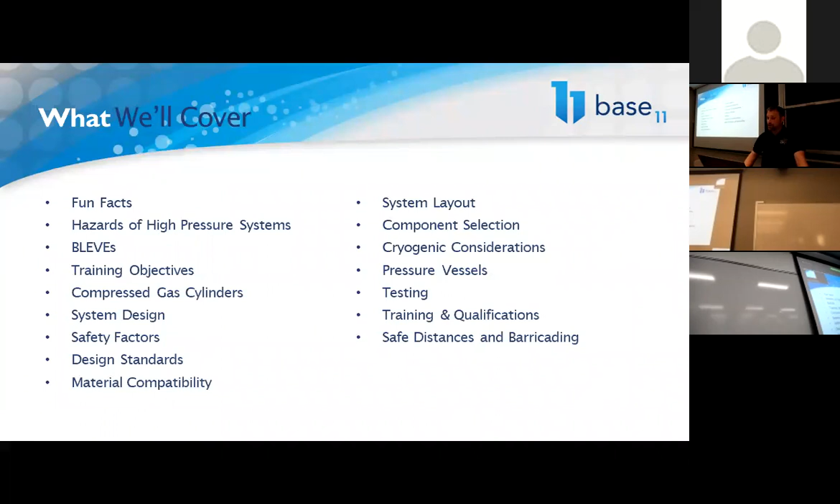Okay, so we're going to be covering a lot of ground here. Some of this is going to touch on other sections. It's a pretty comprehensive subject, and so we'll probably go a little bit faster through some of those things.

But I want to start with a few fun facts, because at the end of the day, what we're dealing with in any high pressure system is stored energy. And there is usually a lot more of it in a pressure system than you might appreciate. A standard decent sized industrial gas cylinder will hold the equivalent of about a pound of TNT. So that's some serious explosive potential there. Just ordinary compressed air from a regular shop compressor can easily dislodge an eyeball from its socket.

It can rupture an eardrum, or it can create hemorrhaging. A 100 psi gas jet through a 1/8 inch diameter orifice, if that happens right at the surface of your skin, can actually enter and inflate your flesh and even cause bubbles in the bloodstream, which can be incredibly painful, if not fatal.

Even air under 40 psi from a hose can kick up debris. It can project metal chips around that can easily puncture your skin or your eyes. And if a hose does fail, it can whip around, and the hazard of that whipping hose can be pretty serious as well.

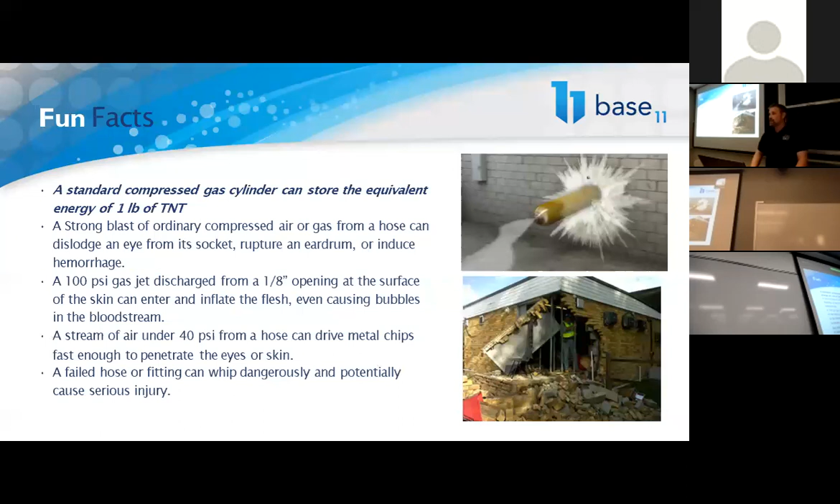So yeah, the goal of this piece of the talk is to try to scare you guys a little bit and leave you with the impression that there are some real hazards here, and that there's a lot of energy that you need to be aware of. Now, the good news is that all of these are entirely possible to deal with, but you need to be aware of what they are, and so that's what we're trying to get across here.

So in any high pressure system, you basically have two main categories of hazards that you're potentially going to face. One are the hazards presented by the fluids themselves. You could have flammable agents, oxidizers, toxic chemicals potentially. You can have asphyxiants. If these things leak out, then you're going to have to deal with the results. Sometimes these fluids will also cause negative effects on the components in systems. They can corrode them, they can embrittle them, and so all of these hazards, due to the substances themselves, are going to be really important to bear in mind.

But the other big piece of it is stored energy, and this is just intrinsic in any high pressure system, which is why we use high pressure systems, because they're good ways of storing and delivering energy. But there is a lot of energy there, particularly when a gas is compressed. Now, gas at a given pressure stores a great deal more energy than water or a non-compressible fluid does. So that's why, in hydraulic systems, pressures upwards of 6,000 psi are pretty common, whereas in a pneumatic system, that's frighteningly high pressure. And so you need to be particularly careful when you're dealing with compressed gases, just because of that compressibility.

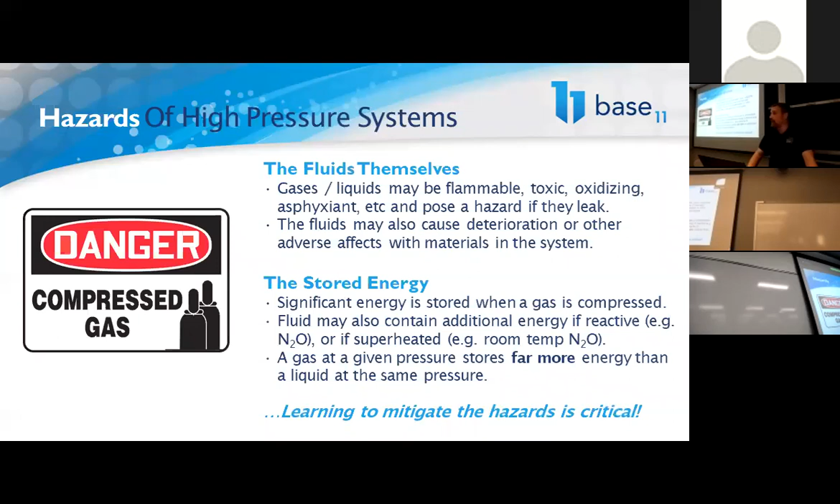There can also be other sources of energy apart from just that pressure energy. If you've got a fluid that's reactive, nitrous oxide is a monopropellant, it can exothermically decompose on its own. Hydrogen peroxide can as well. On top of that, any fluid that is superheated, so if you've got cryogen that's under pressure and heated above its normal boiling point, or anything else, you've got the potential of a BLEVE, which was talked about a little bit earlier on, boiling liquid expanding vapor explosion. And the force of that fluid flashing into vapor as it's released can impart additional energy to an explosion. So all of these things are going to be really important to consider in any high pressure system that you're designing, and learning how to do this safely is really important.

So one of the nice things about giving a talk on high pressure system safety is it gave me a great excuse to look through YouTube videos of things exploding and doing things that we hope will not happen to any of you guys. So we're going to see how well playing the videos over this works, but with compliments of YouTube, we've got a few useful cautionary tales.

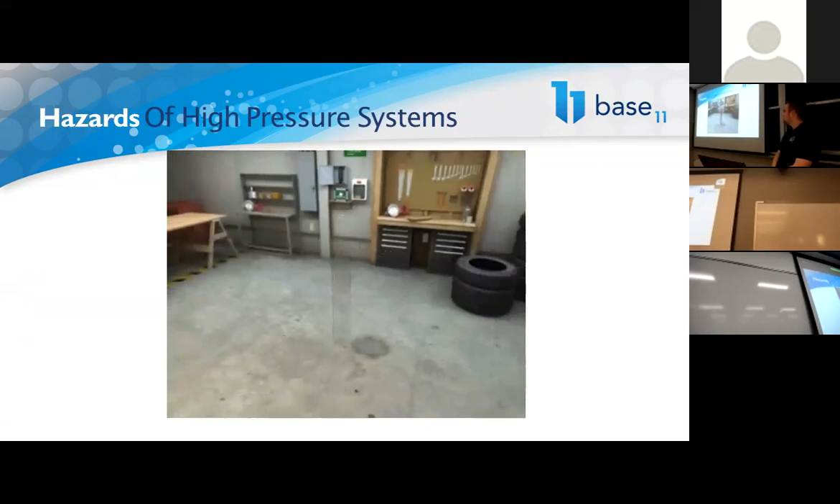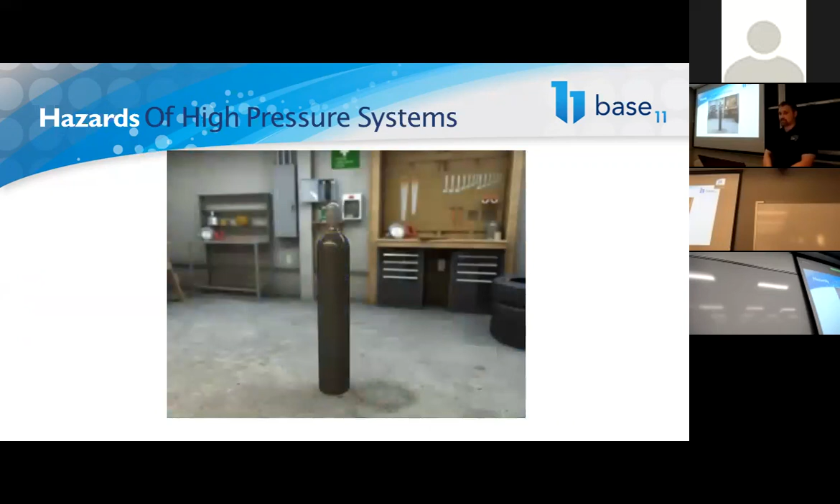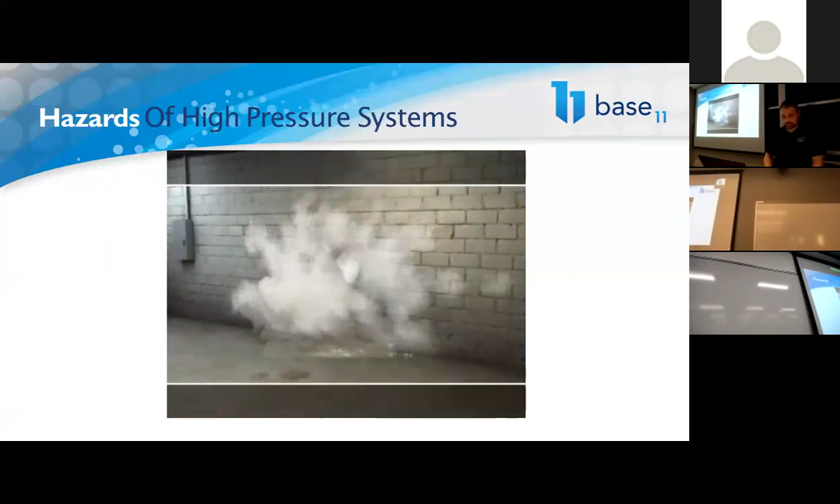When a typical cylinder is filled to its design pressure of 2400 psi, it will contain almost 300 cubic feet of atmospheric pressure gas, or about 160 times the internal volume of the cylinder. This compression of gas represents a tremendous amount of stored energy. If the outlet valve is broken off, the sudden release of compressed gas can turn the cylinder into a missile.

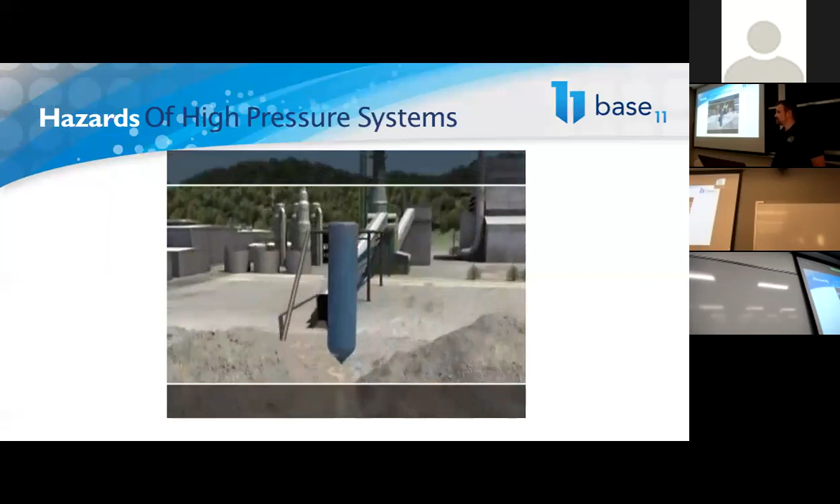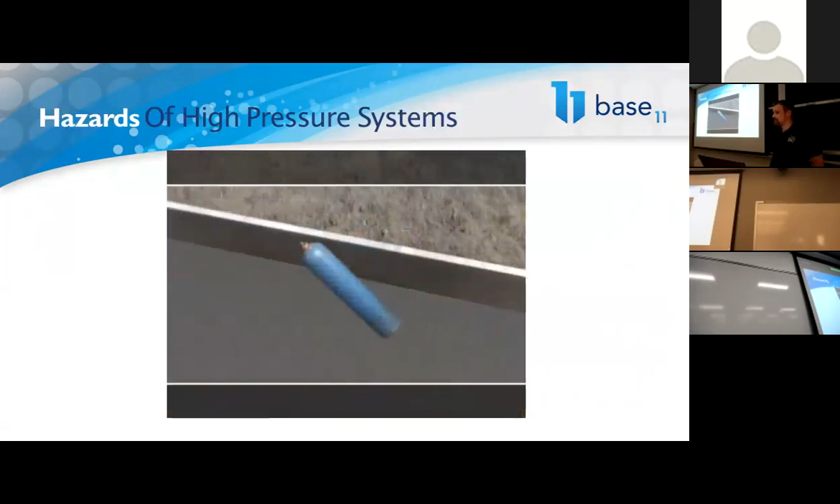With energy to shoot through a cinder block wall. In one reported incident, a damaged cylinder penetrated 2 sheet metal walls before becoming airborne and exiting through the roof. The tank reached an altitude of 140 feet before falling back through the building's roof a second time. When a steel cylinder becomes a projectile, it can move with great force, at high speeds, and in unpredictable directions, with the potential to cause serious or fatal injuries.

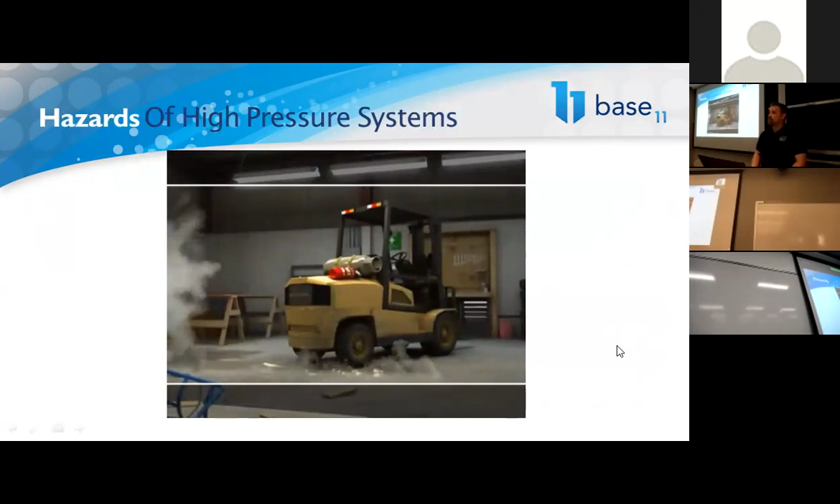So that's what can happen just with a totally ordinary high pressure gas cylinder. The Mythbusters also did a really good look at just what can happen if you shear the valve off of a high pressure gas cylinder.

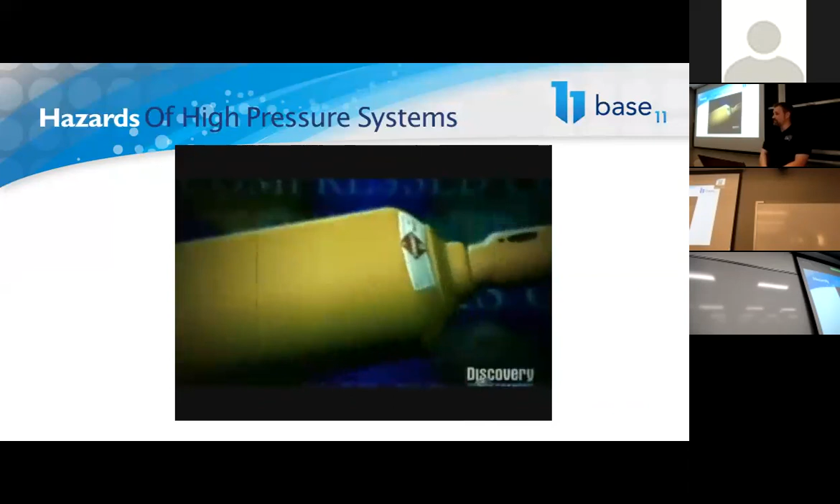High-pressure gas cylinders have been around for 100 years, and legends of their destructive potential have been around for 99. But could a ruptured tank really burrow through a brick wall?

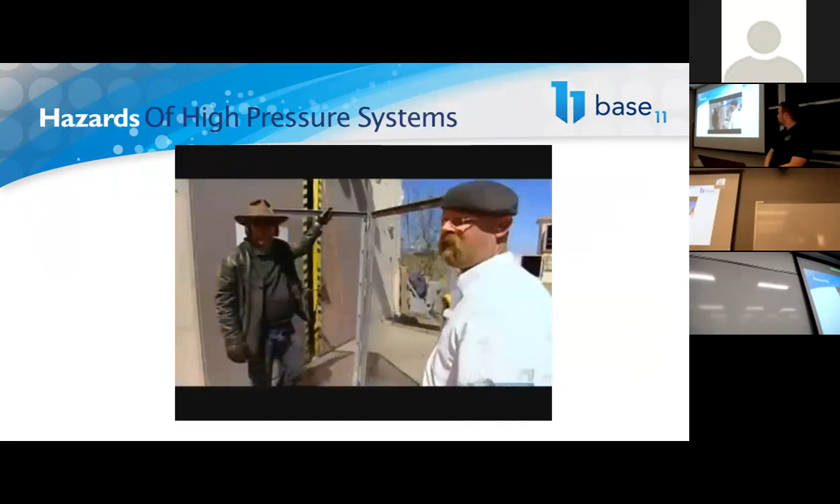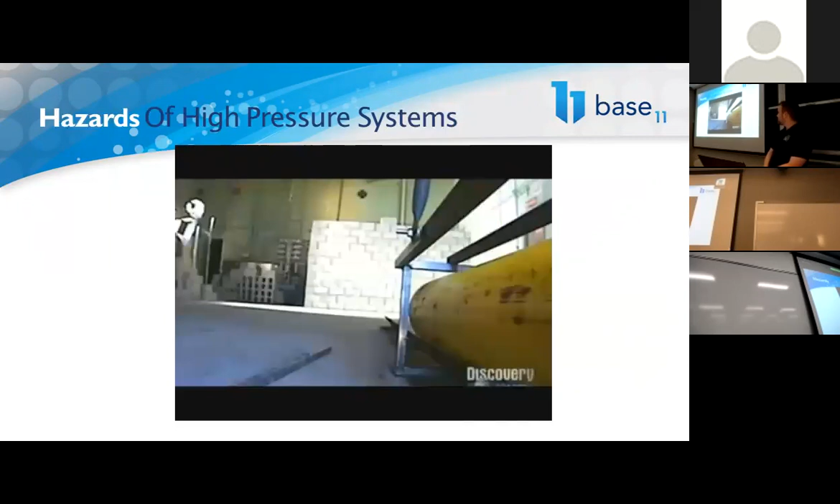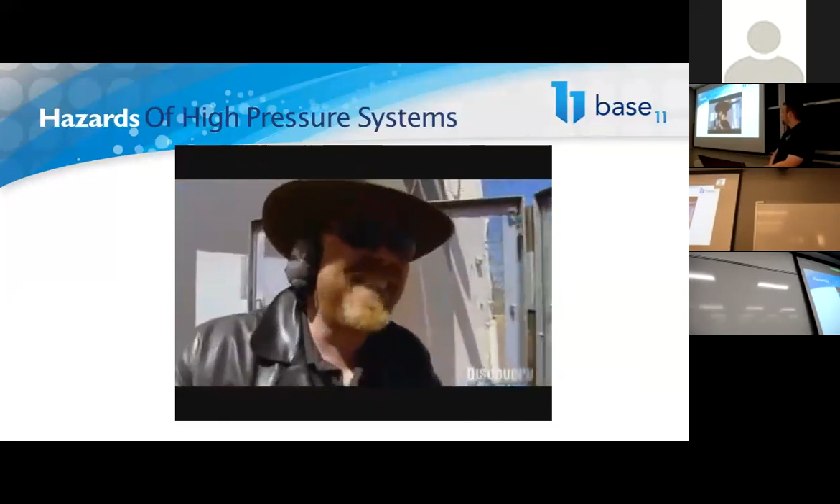Into the next county. Here we go, shearing the regulator off the tank. Attempt number 2. In 5, 4, cross your fingers, 3, 2, 1. Yeah! That's the sound! That is a lovely, lovely sound.

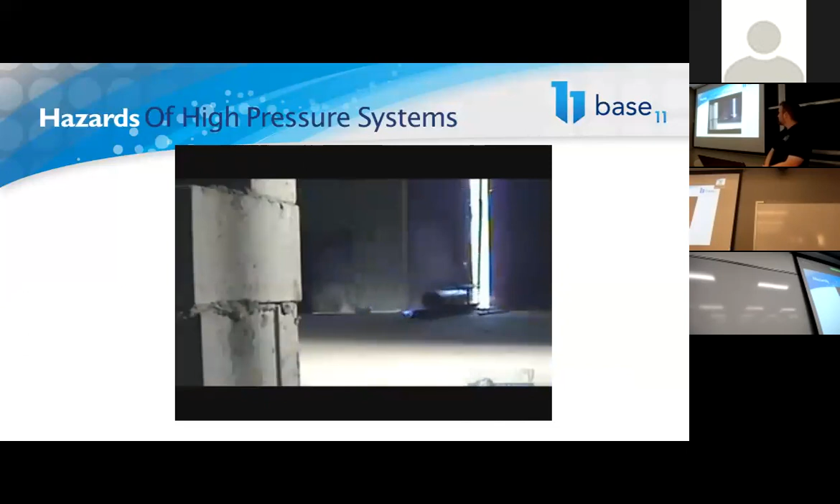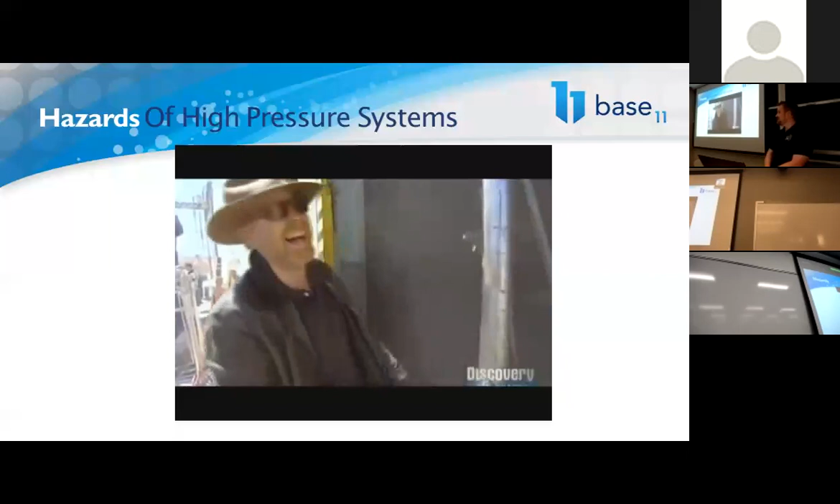The valve has sheared clean off, and that's a very good sign. It looks like the cylinder flew straight and true, but did it have enough thrust to crack the wall? Oh, God. It was the Lord that did it.

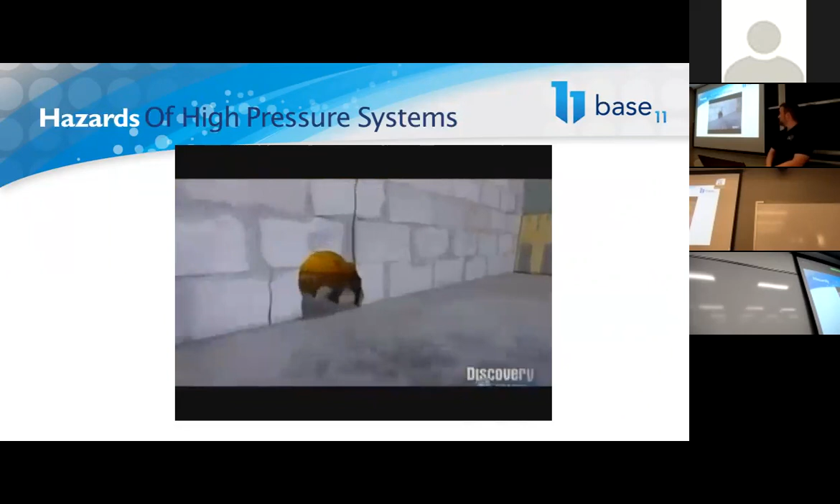At 40 miles per hour, the air tank turned the cinder block to cinders. It even put a fair dent in the wall 6 feet behind it. Totally. I mean, it didn't go all the way through, but it went through this one, and it was working its way through that one.

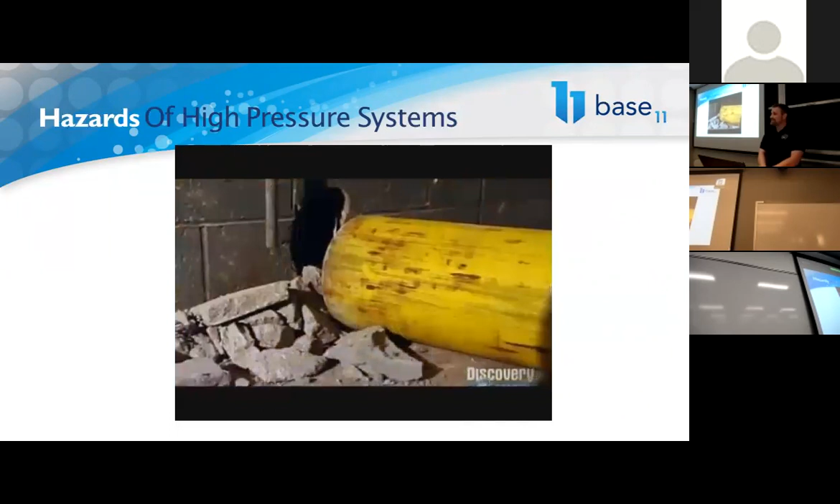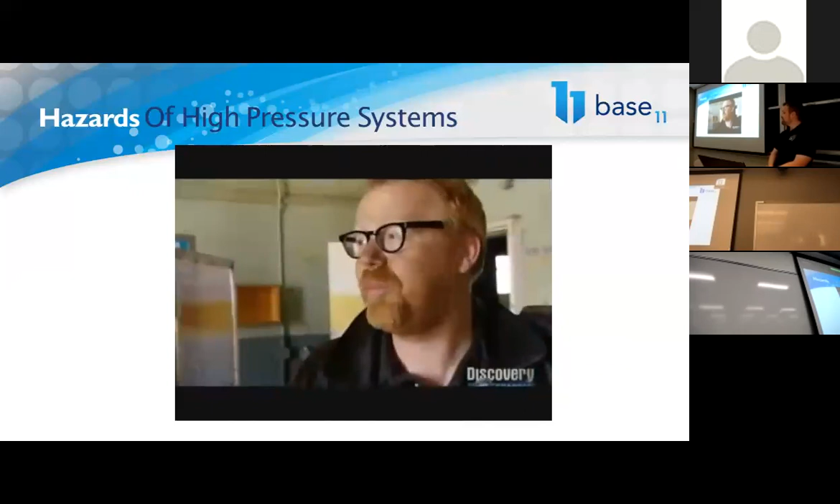I was ready to see this as not possible. I was totally expecting it not to actually work. This is one of those impossible tales. We talked about, heard the story, but no one knew anybody that it happened to. This was an optimum situation for this tank. What this tank did is as good as it gets.

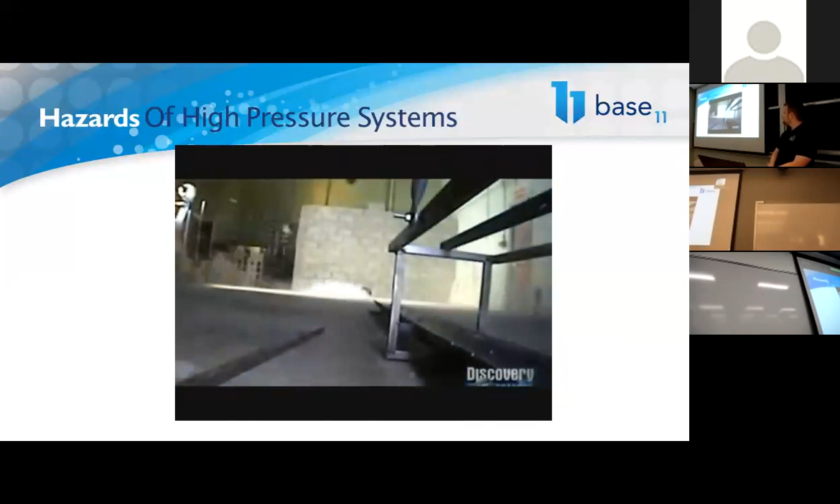My favorite thing is the perfect roundness of this hole. It also pushed this entire wall back a half an inch. Although the cylinder was deliberately aimed, you couldn't ask for a more convincing result. So let's call this myth totally and spectacularly confirmed.

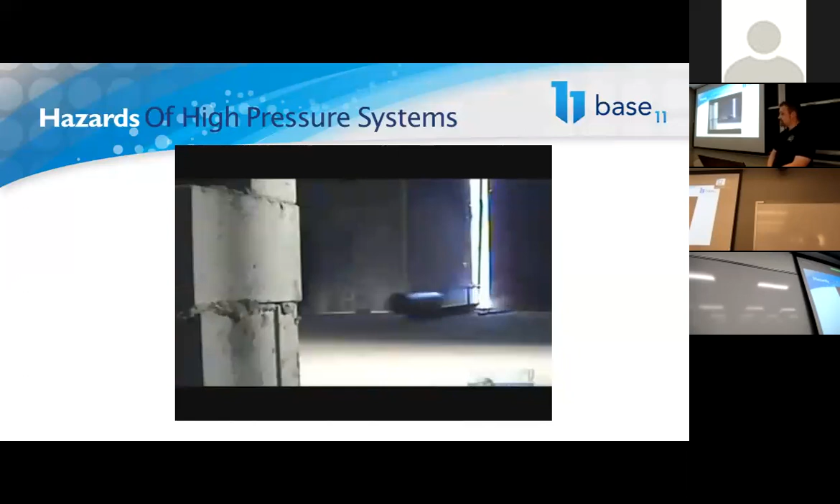And for one more look at what gas cylinders can do.

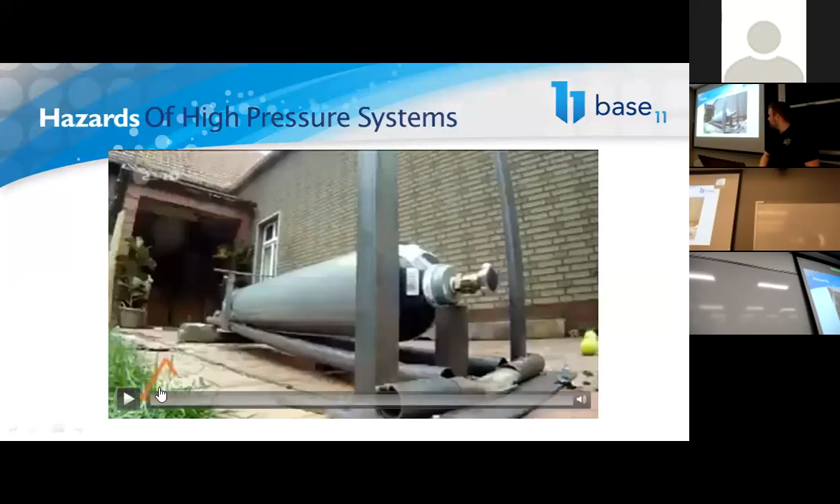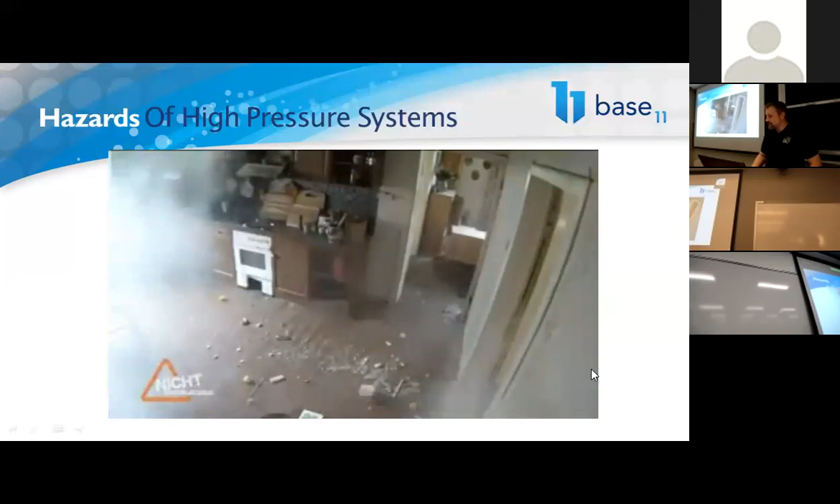Okay, so that's a little taste of just what can happen with compressed gas in a regular cylinder.

I see it's about 1:45 right now. Did we want to do the break for food, or should we go on with BLEVEs? Anyone? Long Beach? Go ahead and do the BLEVE. All right, BLEVE's coming up.

So on top of just the energy in compressed gases, if you've got a fluid that has been superheated, you've got this whole added source of energy as it suddenly expands to ambient pressure. And the force of that happening can cause blast waves. It can help propel shrapnel. And this has actually occurred a number of times. Mark mentioned one that he personally experienced.

But in industrial context, this thing has happened as well. As one example, someone at an industrial facility was using some regular carbon dioxide fire extinguishers. One of these CO2 cylinders had about 5 kilograms of liquid carbon dioxide in it. Somebody threw it into a dumpster. The dumpster was taken off to a scrapyard that put the contents through a shredder. As soon as the shredder encountered the CO2 cylinder, it ruptured it, and the result was a carbon dioxide BLEVE, so the cylinder burst into a few fragments.

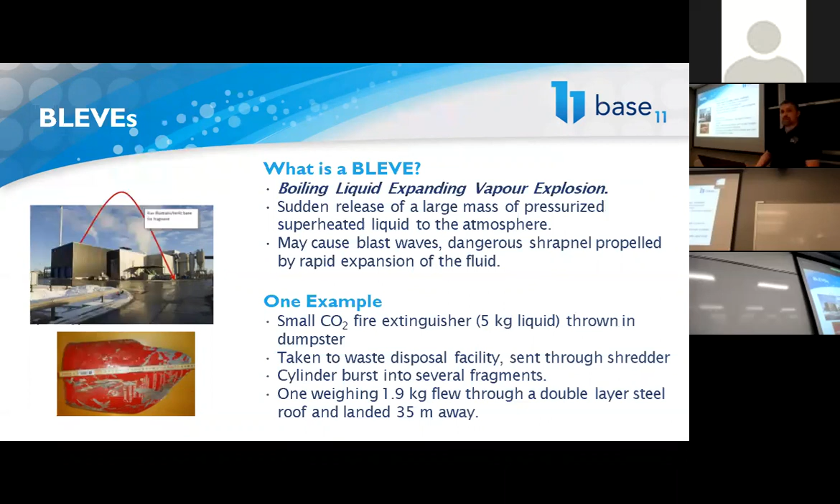You can see one of them at the bottom there. A 1.9 kilo fragment of it flew all the way through a double-layered steel roof and landed 35 meters away. And this is just a regular CO2 fire extinguisher.

One area in industry where you do sometimes see particularly dramatic BLEVEs is in things like propane and natural gas. These are generally stored under pressure, and they will definitely BLEVE if there's a fire or anything else that compromises the cylinder they're stored in.

And here is a National Fire Protection Association video looking at BLEVEs and what they can do.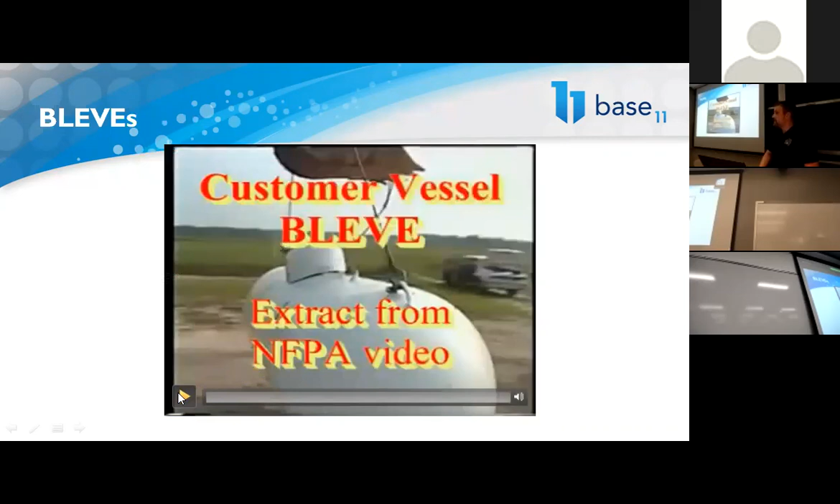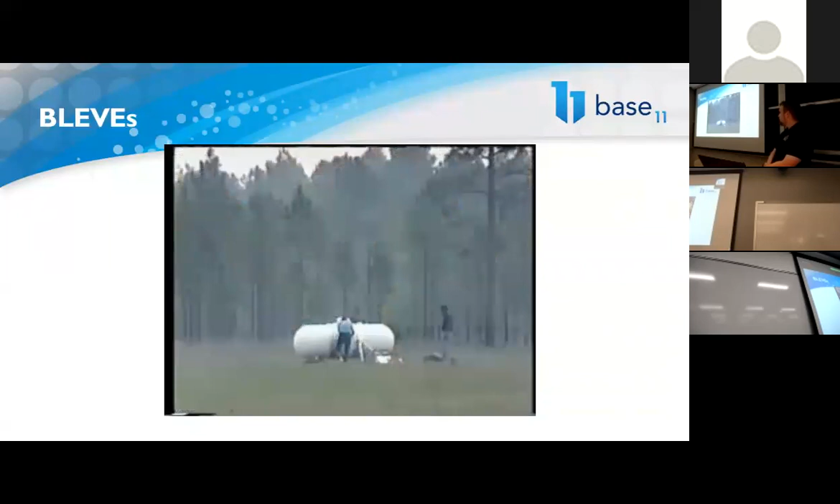Analysis of experimental data and study of actual incidents have resulted in a clearer understanding of the mechanics of a BLEVE. While BLEVEs have been known to occur in tanks weakened by physical damage, such as from an accident, most BLEVEs result from fire exposure.

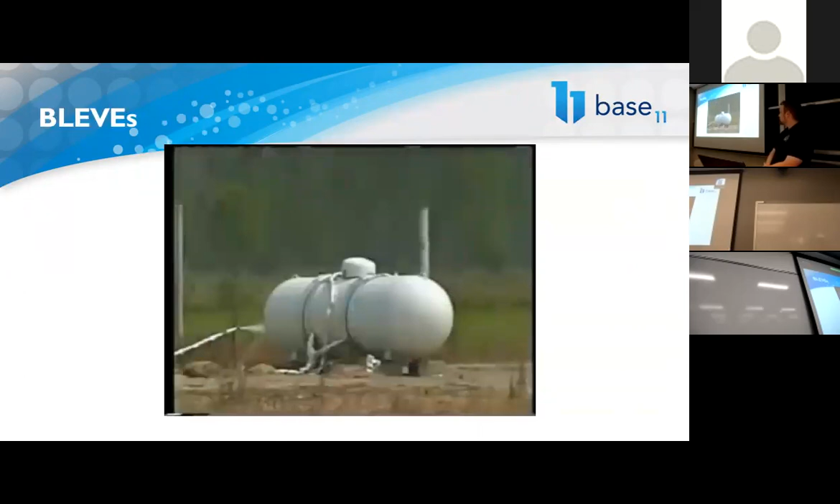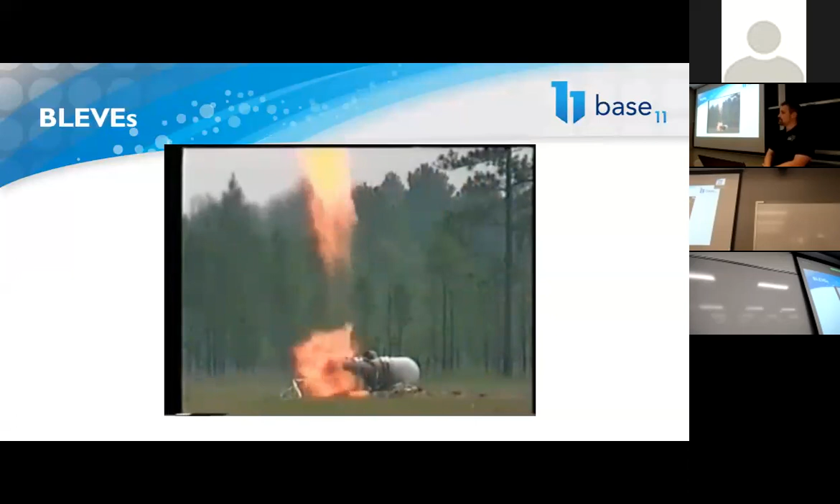When a tank is exposed to sustained heat, such as from a fire, the liquid within the tank is forced to boil or vaporize, resulting in increased pressure in the tank. To prevent overstressing the tank, the relief device activates, venting the excess pressure. As pressure decreases in the tank, the valve begins to close. With continued heating, pressure again builds, causing the relief valve to reopen.

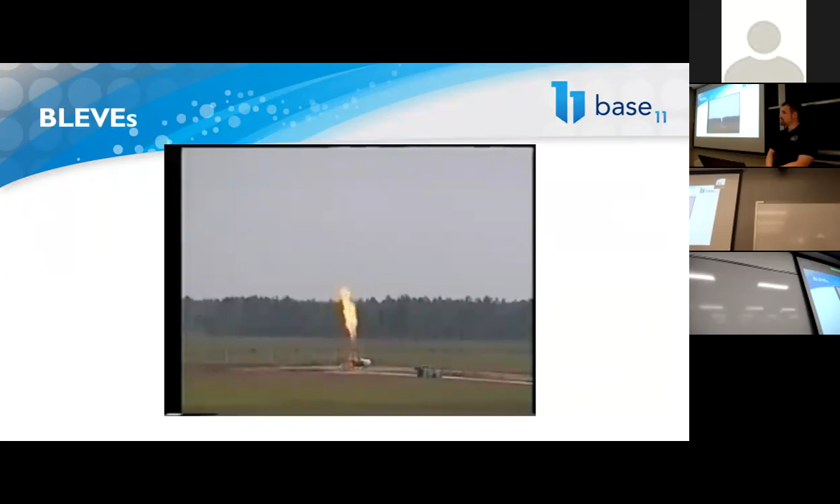Where flames impinge on the tank below the liquid level, the liquid absorbs the heat, allowing the tank metal to remain at a safe temperature. With continued relief valve operation, the liquid level drops, exposing a greater area of the tank to the effects of heating.

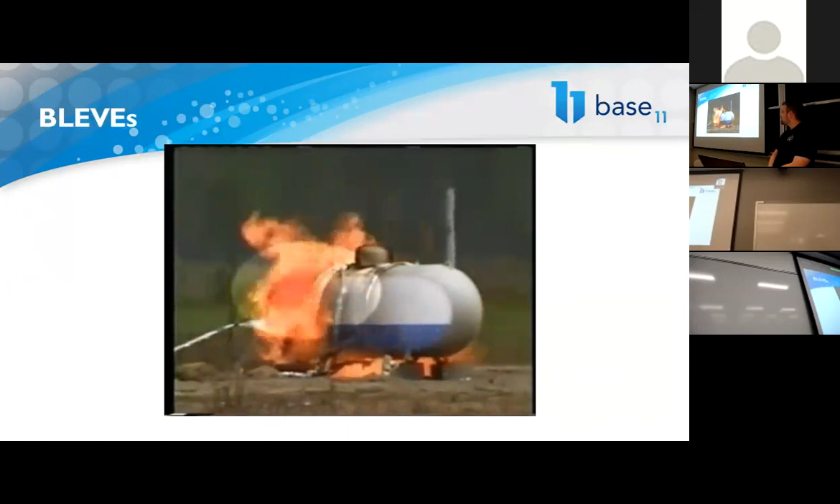With the flames impinging on the vapor space of the tank, the temperature of the tank metal, uncooled by liquid, rises. At some point, due to the vapor pressure from within, the tank metal begins to weaken, stretch, and eventually tear. As the tank comes apart, large quantities of both liquid and vapor are released in a powerful explosion.

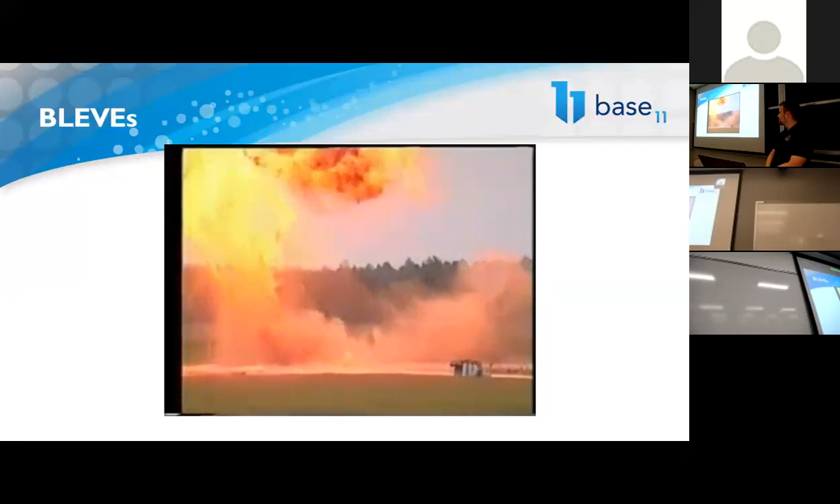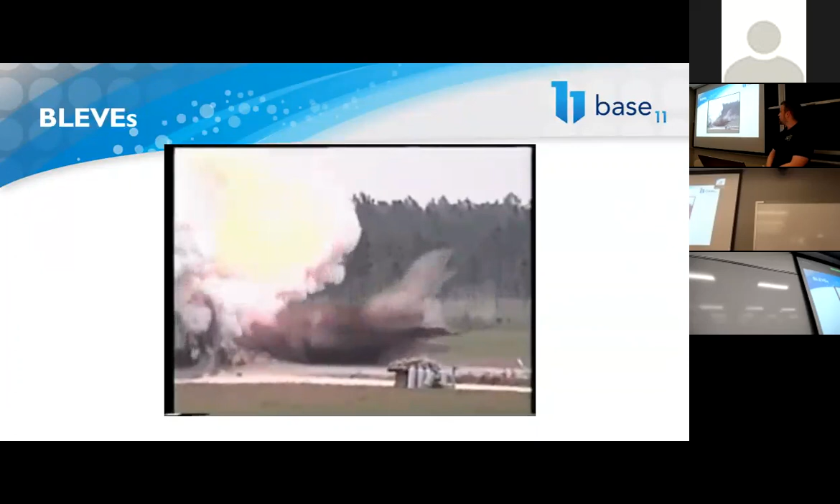The heat radiated is sufficient to ignite combustibles and cause burns great distances from the explosion. Tank sections containing rapidly igniting fuel can become flying missiles, traveling great distances, causing secondary fires and other damage. It all happens quickly, with little warning.

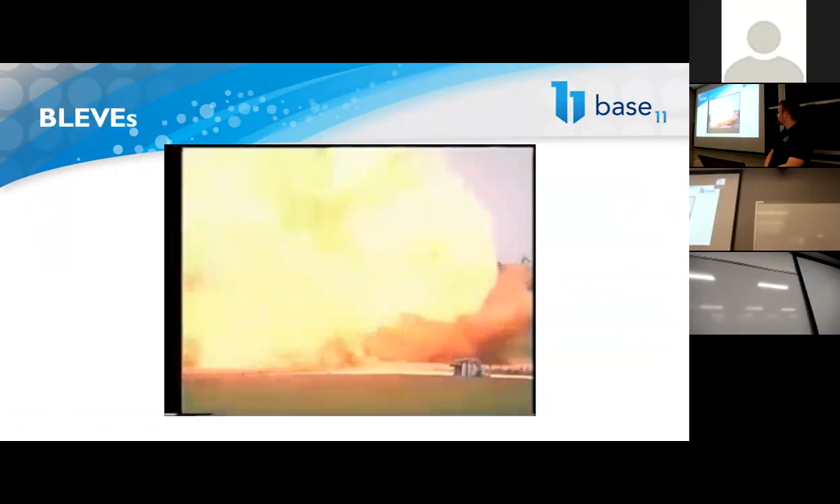Okay, so those are just a few examples of some of the very tangible hazards with high pressure systems. Now, here's another one that is maybe more directly relevant. So we obviously just saw what can happen if you've got a natural gas BLEVE, but what about something like liquid nitrogen?

So this was an incident that actually happened at a university in the United States, involving an old LN2 cylinder. Now, first of all, on the picture on the left, we looked at spotting the safety hazards. What are some of the safety hazards associated with what you're seeing there? No PPE, very good. Yeah, he doesn't seem to be wearing any eye protection, and you can see a big cloud of venting nitrogen. So probably some eye protection would be in order there.

So there was this cylinder at a university, and it was being used in the second-story chemistry lab in the building. It was an older cylinder, and like any properly designed cylinder, it incorporated pressure relief devices, including a relief valve and a rupture disc.

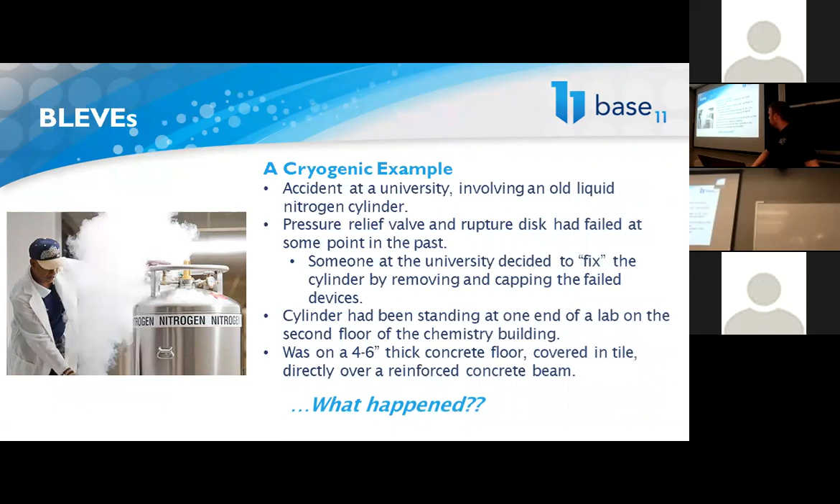So what happened with this? Well, it blew up, and specifically here's how it blew up. These were double-walled insulated cylinders. The inner tank started to expand as it yielded, and eventually it expanded to the point where it was in contact with the outer wall. That then constrained it so it could only expand on the ends. And it kept doing that until the bottom weld failed, and based on the accident report, they figured that happened at about 1200 psi.

And the resulting explosion of this liquid nitrogen cylinder blew all the tile off the floor in a 5-foot radius around the tank, and it shattered the tile into shrapnel about the size of quarters, which embedded themselves in the walls and door of the lab. The door and the wall the door was attached to were blown completely out into the hallway. The remaining walls were all blown 4 to 8 inches off their foundations.

Every window was blown out into the courtyard except for one that was already open. The blast cracked the concrete floor underneath it and shattered the supporting beam below that. Then, of course, after doing all that, the cylinder took off through the ceiling. The ceiling was also 4 to 6 inches of concrete, and it went right through it into the mechanical room above.

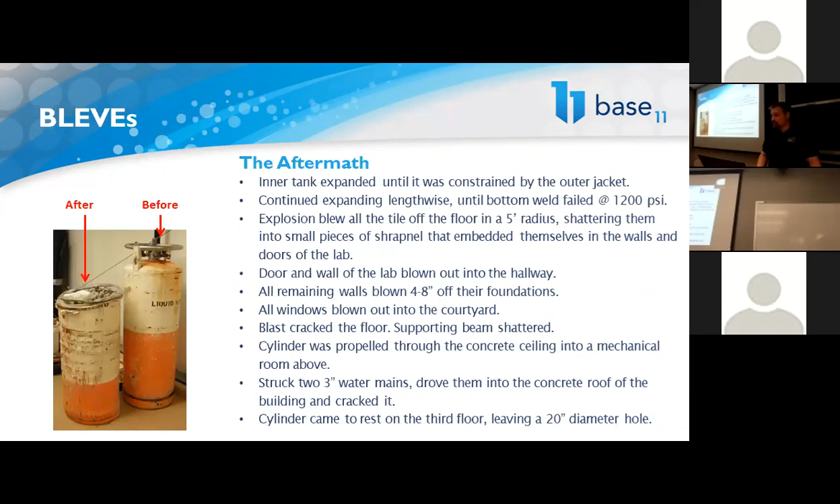So that was what happens with an inert cryogen. What happens if the fluid is actually something reactive like liquid oxygen? Well, that happened as well.

This particular story involved a couple guys who managed to salvage an old liquid oxygen dewar from a junkyard, and in their wisdom they decided to try to fill it. So they did, and they found that immediately it started venting out through the relief valve. So to solve that problem, they removed the relief valve and plugged it. And not surprisingly, that stopped the leak.

So then they put their cylinder into the back of their truck, they loaded it completely, and took off down the interstate. Now, at this point, they got incredibly lucky. The truck got a flat tire. And so they pulled over and started working on changing the tire.

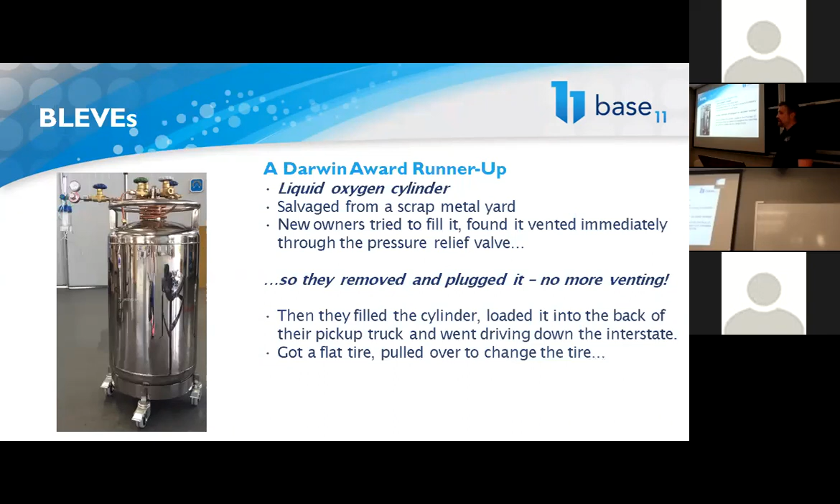One of the 2 men was blown clean across 5 lanes of traffic. The other man flew about 40 feet in the other direction. The resulting blast wave of oxygen hitting the gas tank of the vehicle didn't react well. And so the results you can see there.

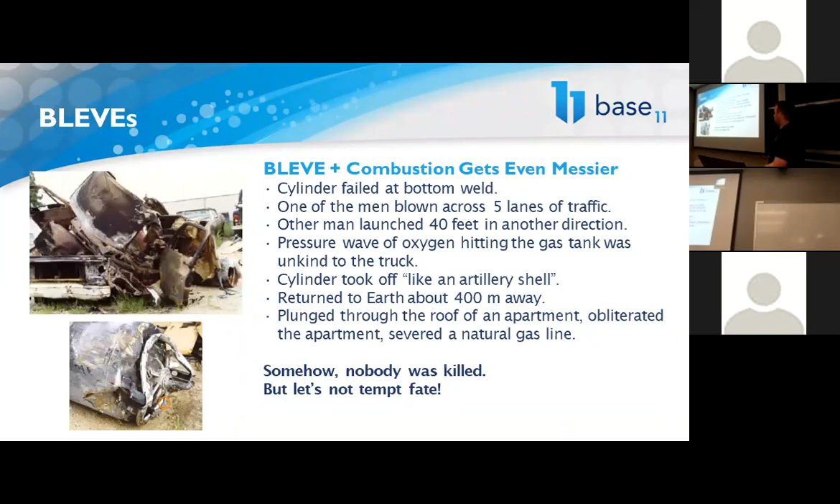The remainder of the cylinder took off like a rocket, literally, and returned to Earth about 400 meters away, where it plunged through the roof of an apartment building, annihilated the apartment underneath it, and severed a natural gas line. Once again, somehow nobody managed to get killed with this, but this is a really good example of what not to do, and also a good example of why these systems always come with overpressure protection.

So that kind of sets the stage here. And what we're trying to do with this training is to make sure that you guys really understand the kinds of energies that we're dealing with in these types of systems. So this is all stuff that actually did happen. So once you know them, you can then take steps to avoid them, but it's important for you to know them.

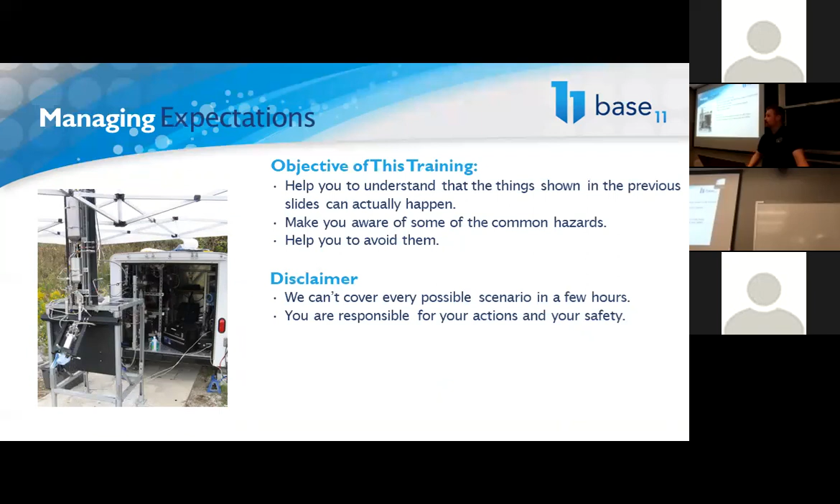So let's start with looking at compressed gas cylinders, because they're going to be probably the most common source of pressurized fluid that you're likely to encounter.